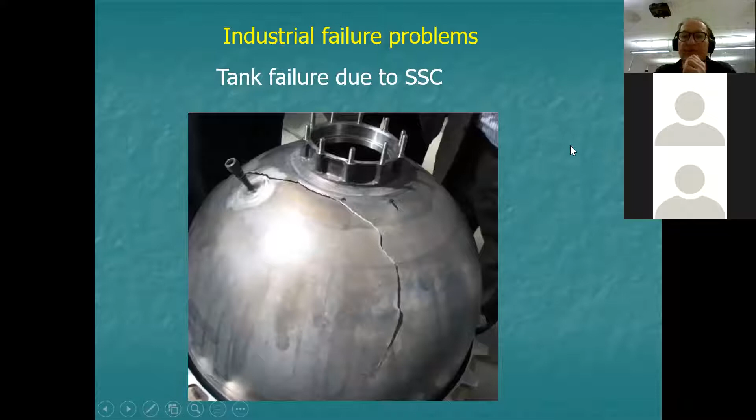What's important to understand is that in many industrial accidents and failures, there are problems with metals cracking. Here's an example of a tank failure. This is a steel object that quite clearly has a crack going all the way through it, and this is due to a phenomenon known as stress corrosion cracking. It's so important that you need to know about it in a course on corrosion.

This can be catastrophic, it has to be said. There have been many failures in industrial plants over the years, over decades even, where stress corrosion has happened or occurred, but people didn't realize it at the time, and therefore the accident happened. It's very often caused by something called hydrogen embrittlement, so we'll say quite a lot about that today.

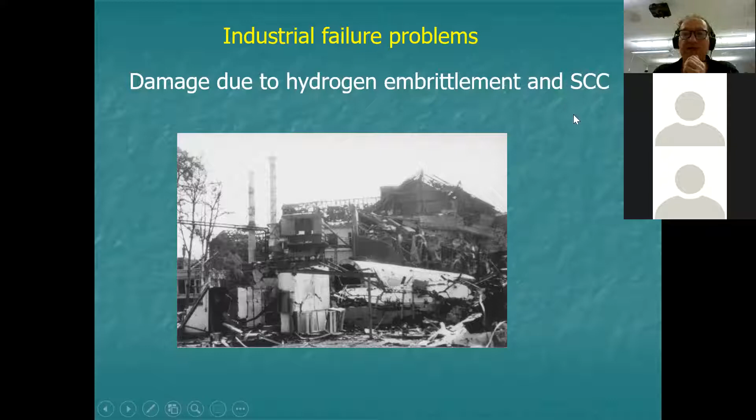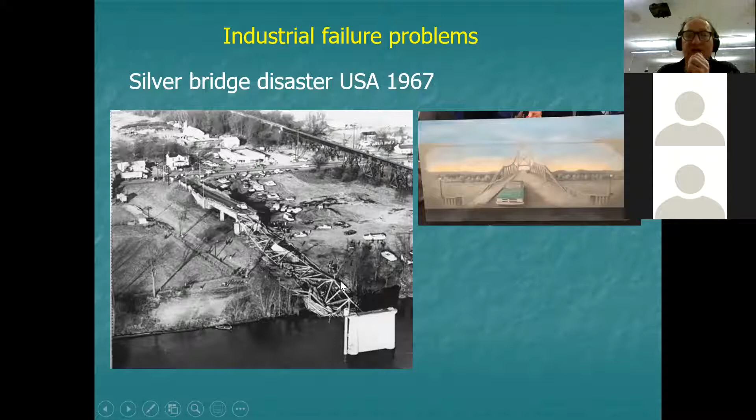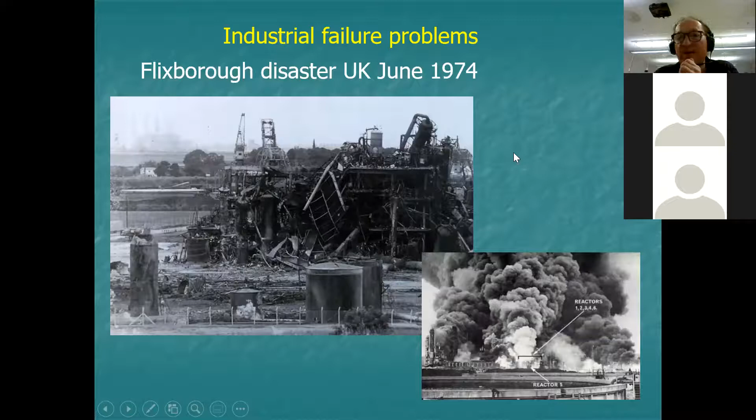Here's another one. This is the Flixborough chemical plant disaster that happened in the UK in 1974. I actually remember this because I was in high school when this happened, and at the time, this was one of the largest explosions ever to happen in Europe. In fact, the blast was so big it could be heard several hundred miles away on the Dutch and Belgian coastline. It completely destroyed the entire factory, and this was entirely due to stress corrosion cracking and hydrogen embrittlement.

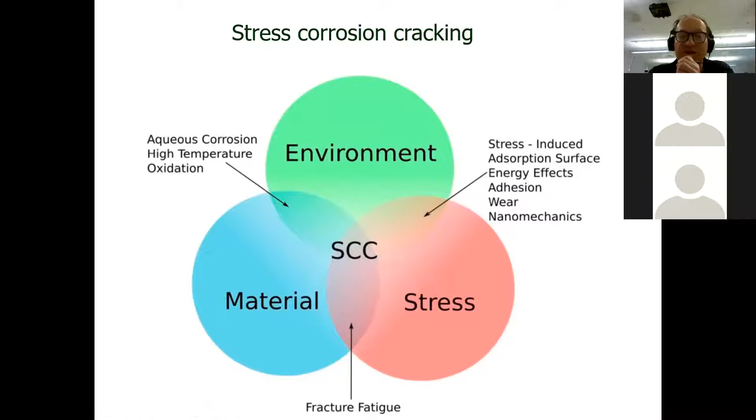And the third bubble is the environment itself. What are you exposing the material to? It could be seawater, high temperature, or a corrosive gas like chlorine gas. Remember, with stainless steel in particular, chlorine and chloride are very aggressive. So if the environment contains chlorine or chloride ions, and you have stainless steel or high tensile steel under stress, you're almost certainly going to have the conditions for stress corrosion cracking. So you have to be very careful when designing such components to avoid the problem, or at least know about it beforehand and do something about it.

Look at this slightly differently. Here's stress corrosion cracking in the middle where the circles overlap. So we can have tensile stress, which generally means the material is being stretched. Metals don't like to be stretched too much because they will yield. If they're ductile, that's not a problem, but if they're brittle, then it's a serious problem.

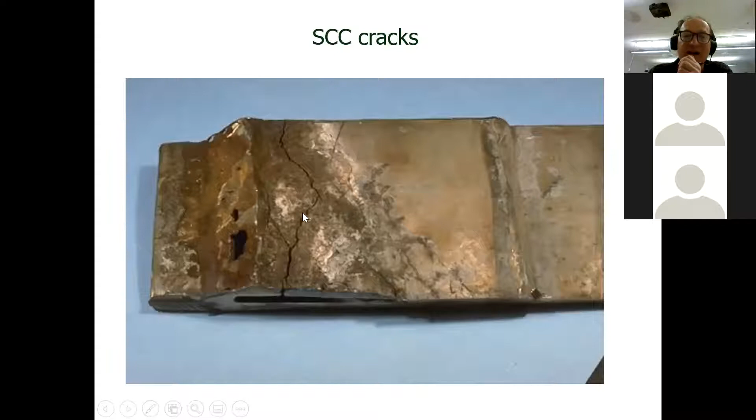If the material is susceptible—and going back to this example, it's susceptible because it's been heat treated, which sensitizes the grains in the microstructure—it becomes a susceptible material. That will typically be stainless steel, especially if it's been welded, or titanium or aluminium. And you need a corrosive environment. In particular, is oxygen present? Is it acidic? Does it contain chloride ions? Is it high temperature? Does it contain chlorine gas or any other corrosive chemicals?

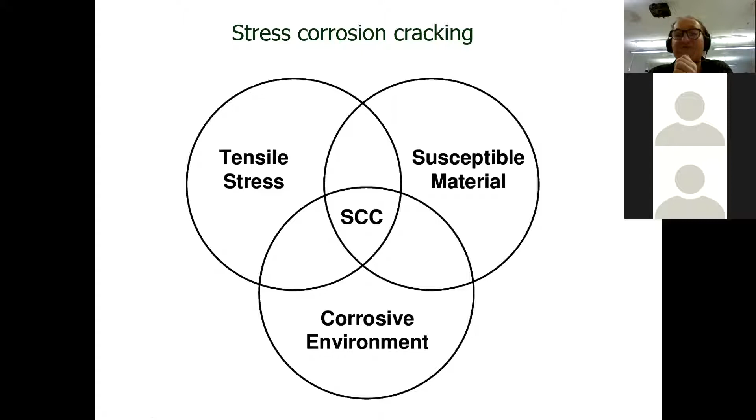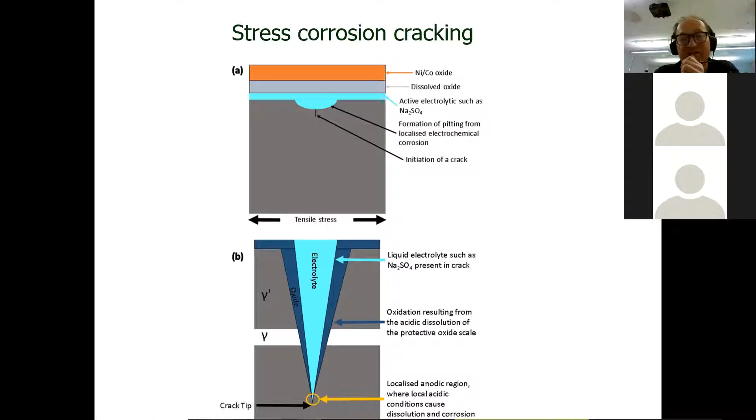And this is just going to grow or propagate. Eventually this crack will go all the way through the material and it'll break in half, especially if you have a large amount of stress. The only way you could avoid that is to take the stress away completely. But this doesn't very often happen in practice.

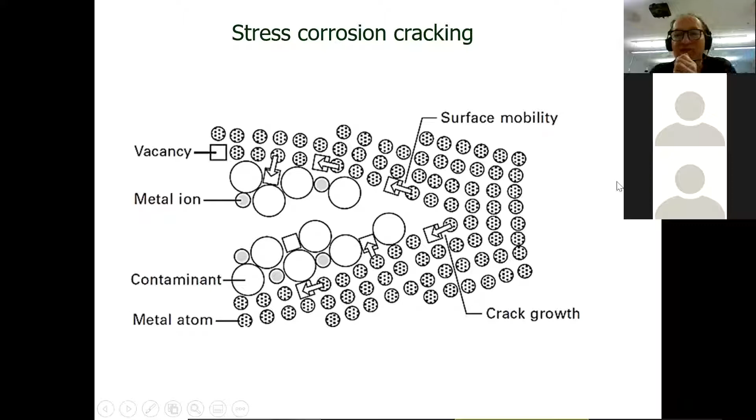And these then can form inside the crack. You've got the tensile force going like this, and you've got the crack tip advancing. So the crack therefore is growing down like this. And another thing to say is that when we get the corrosion product inside the crack, it tends to have a larger volume than the original material, so it can even push the piece apart more, which increases the stress.

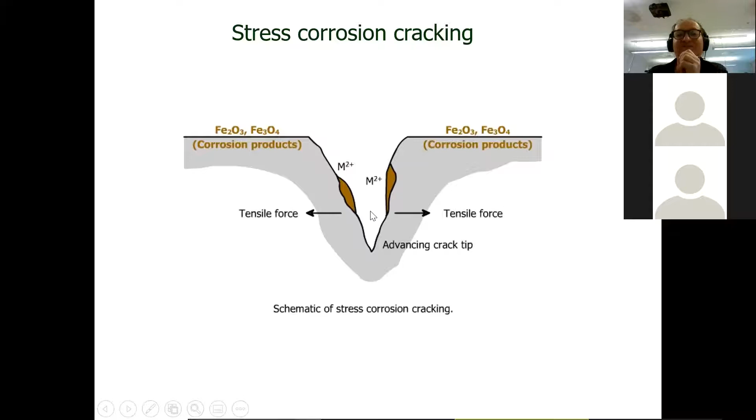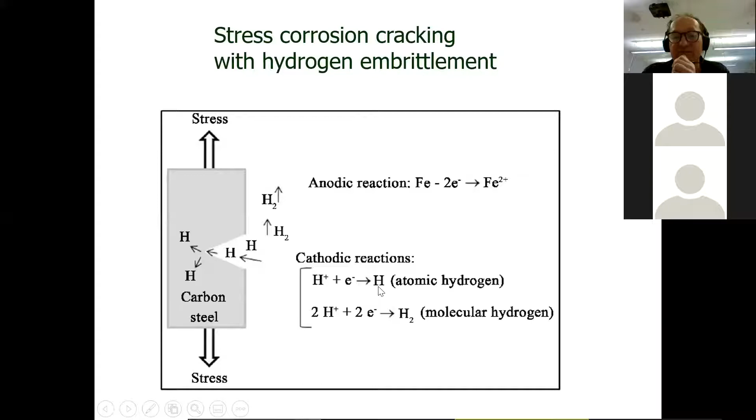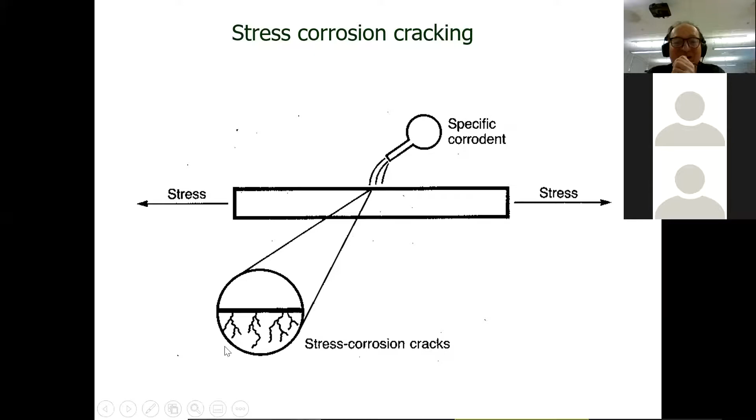If we have a structure which is being stressed, we want to make sure we don't do this, so we have to find ways to avoid it. If you look under the microscope and you're stressing the sample and you have corrosion under the microscope, you'll start to see what looks like a Christmas tree effect or forked lightning. These cracks are going everywhere from the surface. They propagate, and in particular, what happens is the crack goes down the grain boundaries like this.

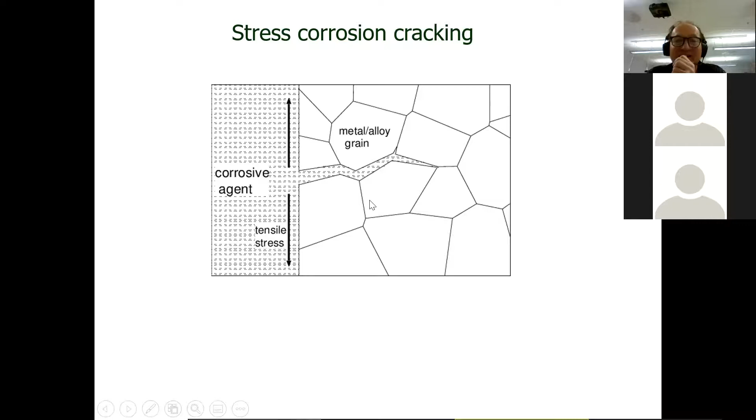It's a vicious circle, if you like, and therefore a runaway situation. Catalytic, you can call it anything you want, self-accelerating. It goes out of control, in other words.

And once you reach that point, then you're almost certainly going to have a failure at some point. Simply a question of waiting long enough for it to happen. It might be years, it might be 20 years or so, but you can be sure it will eventually break.

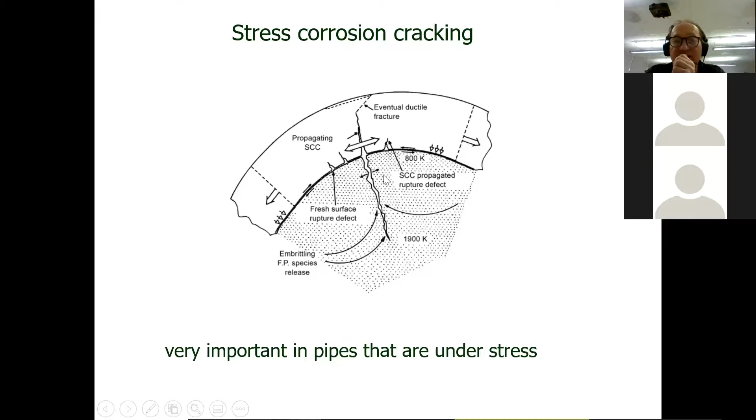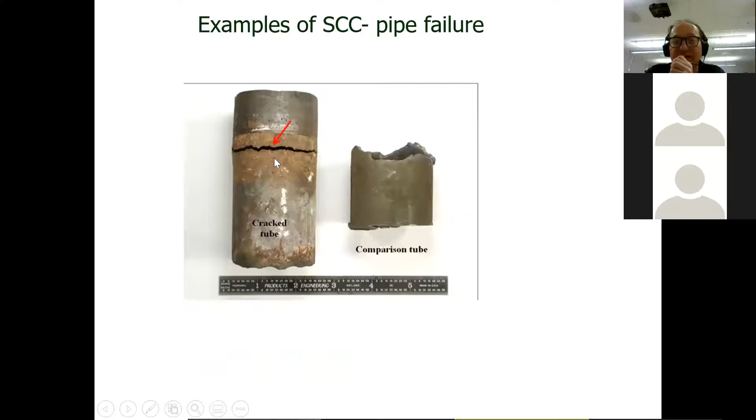And it needs to break in one place. So let's say this fissure grows more than these ones. This will just propagate and just crack straight, and the pipe will burst at that point. And most likely what it will do is go like this. So it probably started then, it just propagates down in this direction in this case, or it might even do this, okay? Or it might just explode into thousands of pieces.

This is stainless steel, and it's been caused by chloride ions. Stainless steel is very susceptible to corrosion by the presence of chloride ion. In particular, if it's stressed like this is, you will get stress corrosion cracking as a result of the attack of chloride ions.

So stainless steel is very susceptible to stress corrosion cracking if it's in contact with something aggressive like chloride ions. If it's just in contact with fresh water, it's probably going to be perfectly okay, maybe no problem ever. Or fresh steam, it's probably okay. But the moment you get chloride ion or some other ion in there, then you have the problem.

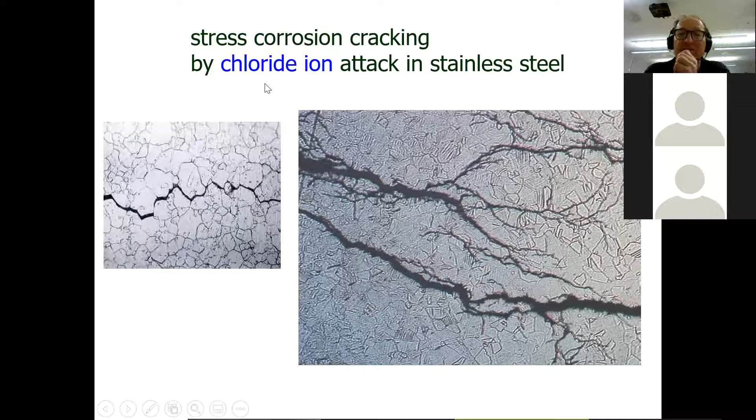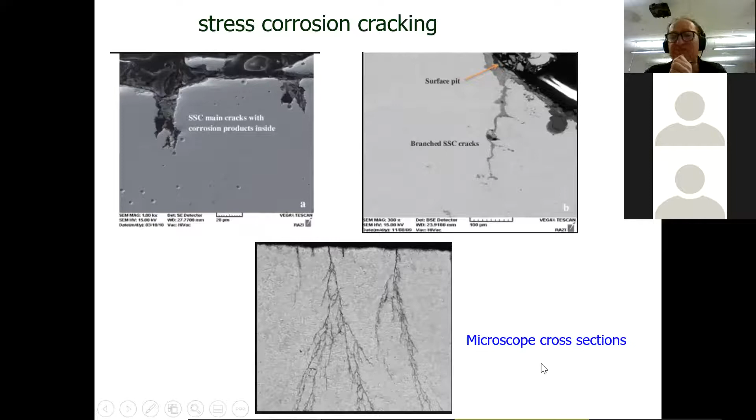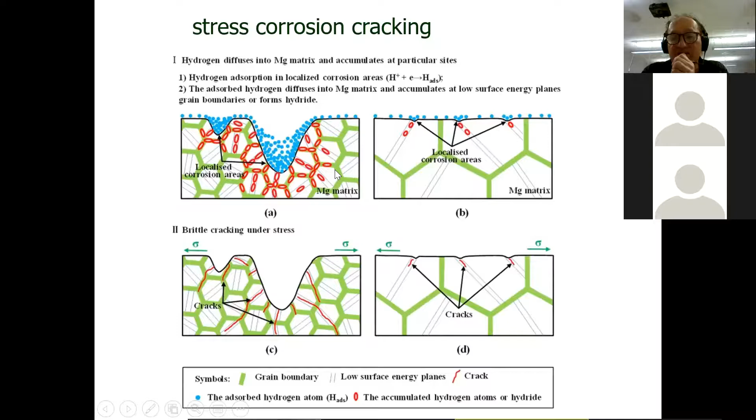This is another one I picked up, just showing the same story again. This is magnesium, a magnesium matrix alloy. So magnesium also suffers from this problem. Magnesium reacts with hydrogen to form hydrides, so magnesium is particularly susceptible to stress corrosion cracking because it very easily reacts with hydrogen.

And so therefore, we talk about hydrogen-induced corrosion, HIC for short. So we have two acronyms: SCC, which is stress corrosion cracking, and HIC, which is hydrogen-induced corrosion. The two things are related, as I've just said. One actually causes the other — the hydrogen embrittlement, or hydrogen-induced corrosion, causes the stress corrosion cracking to occur.

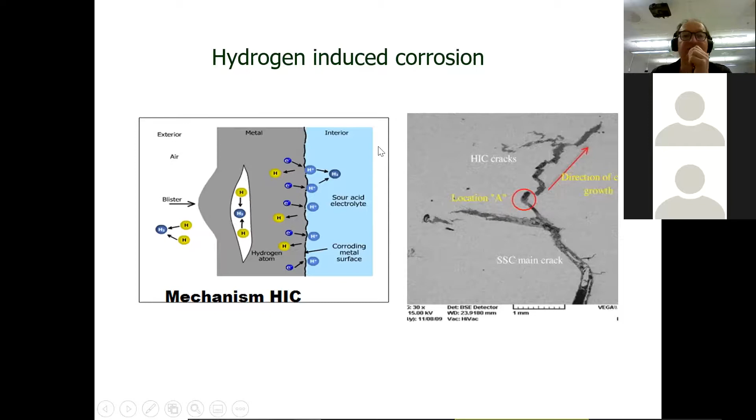Hydrogen sulfide is very common in nature. It occurs in the subsoil due to vegetation degrading under anaerobic conditions, giving rise to hydrogen sulfide gas. This is the bad smell you can often smell in a boggy area — the smell of bad eggs, in fact. So hydrogen sulfide is formed in nature, and the damage it does is it produces hydrogen easily.

This hydrogen then gets absorbed into the metal along the lines I've just described. And when you get hydrogen gas formed in the body of the metal, it forms a blister, and it can cause stress corrosion cracking to occur.

And therefore you get this cone-shaped crack forming. And here's some reactions that we need to consider.

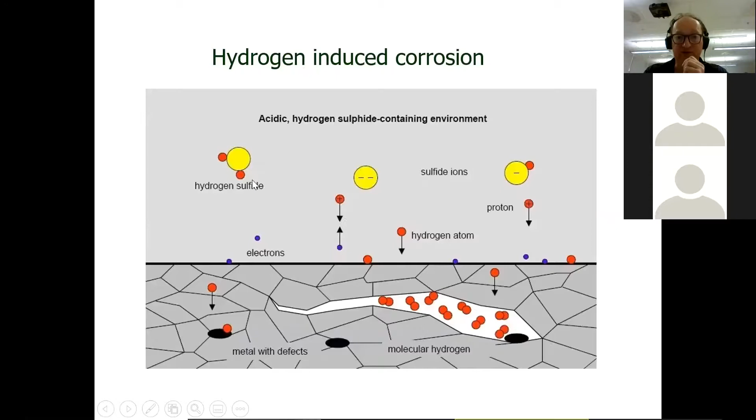But if we happen to have acid present, such as I just showed here with hydrogen sulfide, then you have to consider this reaction as well, the proton plus electrons making hydrogen gas. So this is the main reaction causing hydrogen embrittlement.

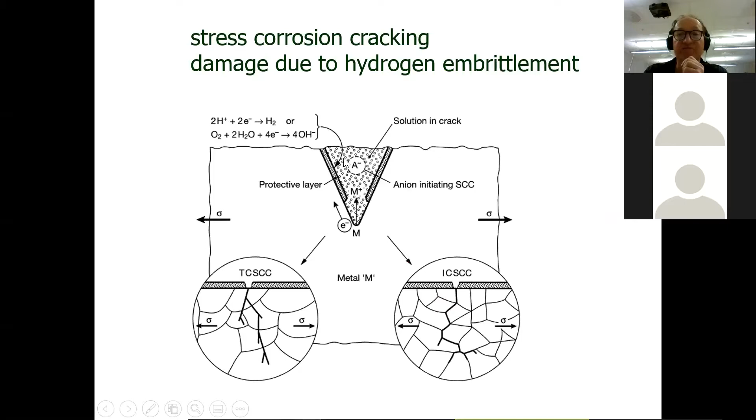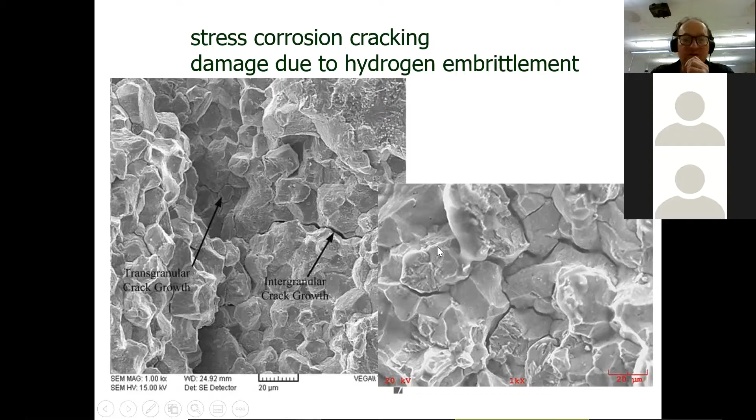And there are two types of cracks marked on this micrograph. There's one called intergranular crack or crack growth, that's where the crack goes between the grains, which is the most common mechanism because that's the path of least resistance. Now, sometimes you get something called transgranular cracking, where the crack goes through the grain itself from one end to the other, right through the grain. This is less common, but if you're observant enough, you will see it under high magnification like this.

So I'm almost done with this side of things. I just want to really get the message home, that once you form a crack, you have an atmosphere inside the crack, which then causes severe stress to build up at the tip of the crack, and this causes the sample or the material to break through embrittlement.

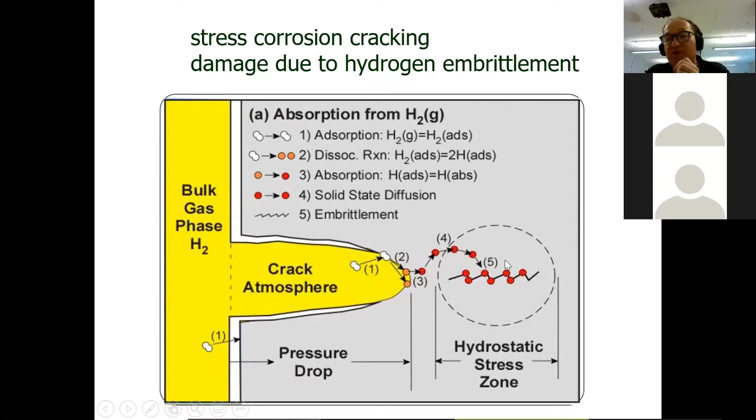And there are various processes you need to know about. You have adsorption, you have dissociation, absorption, hydrogen absorbed in particular, you have solid state diffusion, and eventually you get embrittlement. So all of these 5 things you would need to know about. If you want to become an expert, then you need to read about these - I'm just giving you the basics for now. And the solid state diffusion occurs upstream from the tip of the crack.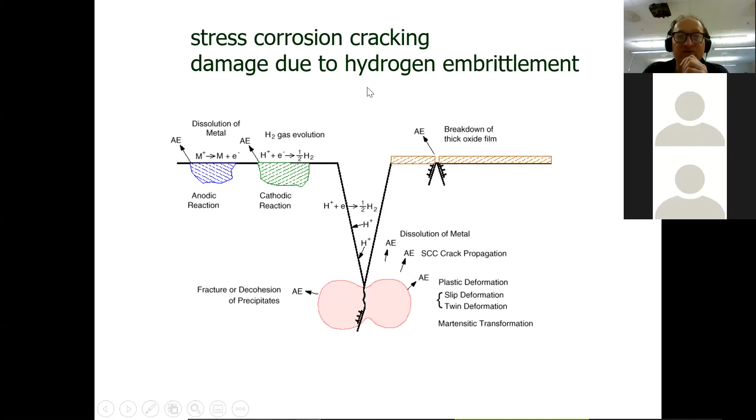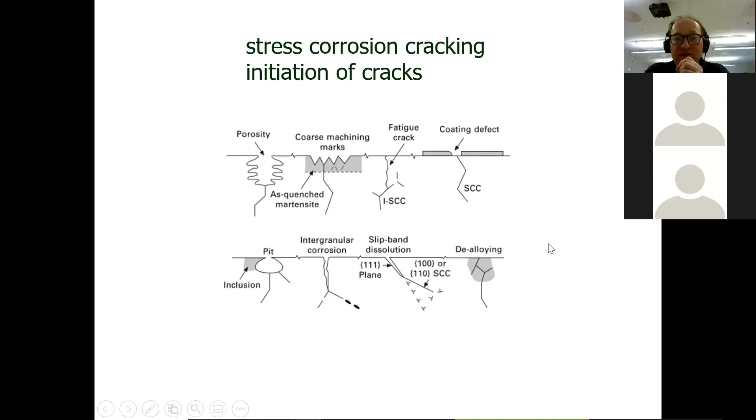But if we talk about neutral and low pH, then the hydrogen embrittlement could be a problem if the metal is susceptible to it. And I've got some more diagrams here. I'm not going to go through all of them in any detail, but you can read this in your own right - it's just here for completeness.

And we did this before in a previous lecture, so I'm just giving a link to that one where we looked at cracks and we looked at movement through the grains. This is intergranular crack propagation, and this happens to be in a weldment where we have a large amount of chromium carbide present. Remember what I said about chromium carbide in weldments? Well, that's also susceptible to stress corrosion cracking through intergranular cracking.

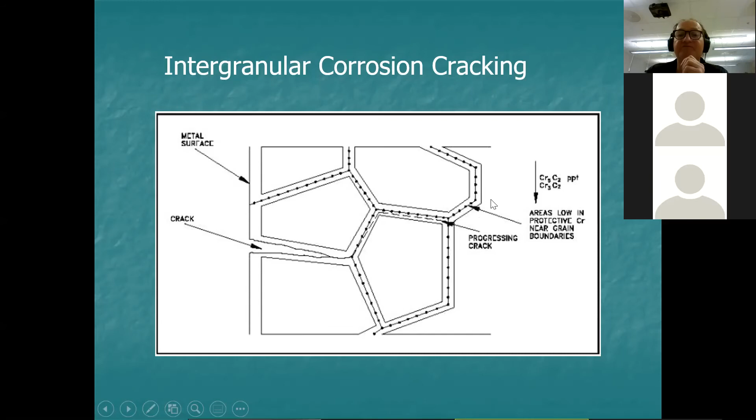Here's a case for copper. This is a copper alloy - it would probably be a brass, in fact. And you can see the cracks propagating through the surface, and these are intergranular cracks mostly.